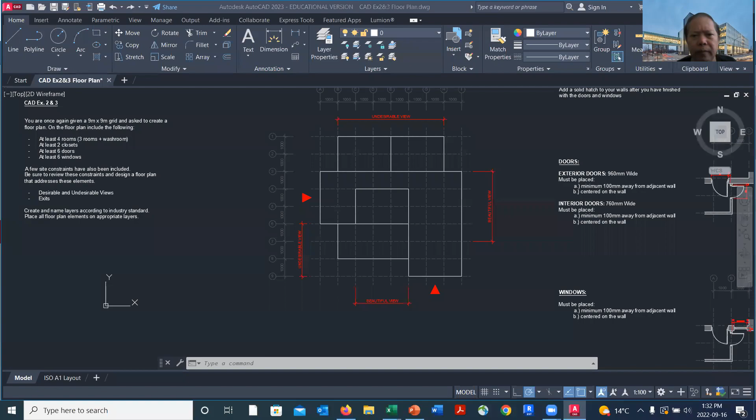So for this one, it looks like I might be needing more space. So I'll just try to use the entire 9 by 9 footprint or space.

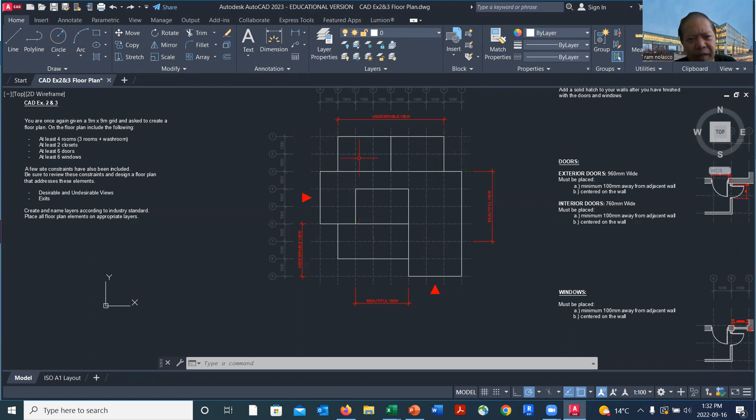So to edit this, I can use the fillet command. F is the shortcut key for fillet, and currently the radius is set to 0. Because there's a radius of 0, if I click on two lines, they will actually connect with each other. So I'll do that again: fillet, select one line, select another line intersecting that line, and it will connect. Let's do that again, fillet, F, select one line and select another.

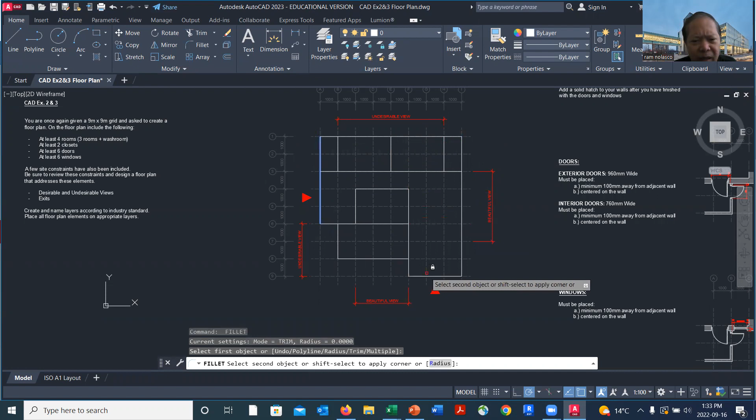Now I have lines that are showing the entire border for the 9 by 9 grid line. Okay, so maybe I'd like to delete this for now. Let's delete those for now.

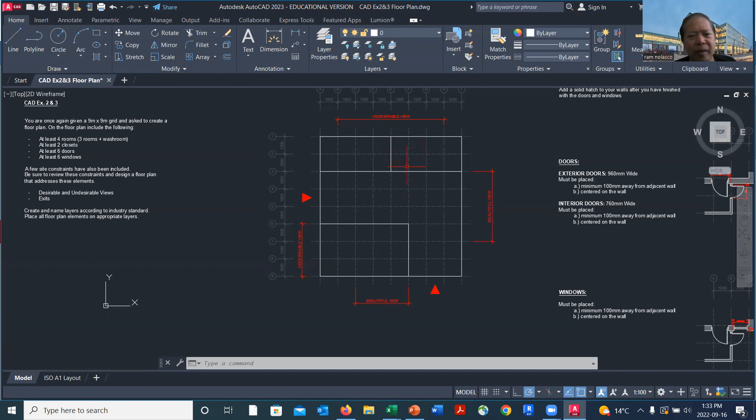And what I want to do is, I'll have my entrance here. Let me delete this. Okay, and I'll try to place my washroom right here at the center where the undesirable view is, right? So it's an undesirable view. That means I can actually place a window there, and that window doesn't have to be open, right? But it can allow light in, so it could be frosted, so I don't have to see anything there.

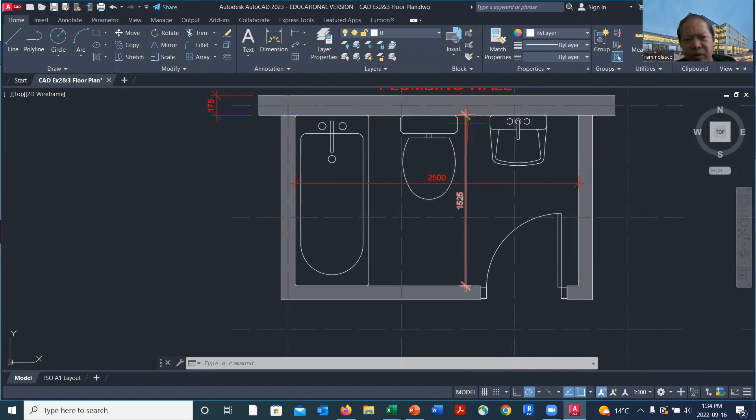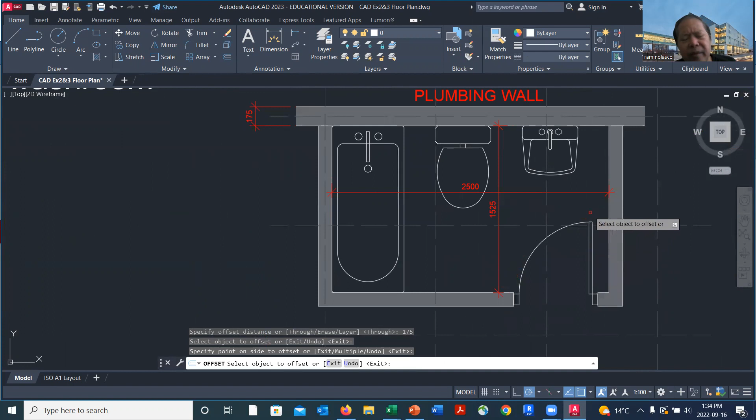So the size of our closet, right, washroom, is about, let's see, 1525. That's 1525 from a plumbing wall. The plumbing wall is 175. So what I need to do is offset this by 175. That will be my plumbing wall. And then place a...

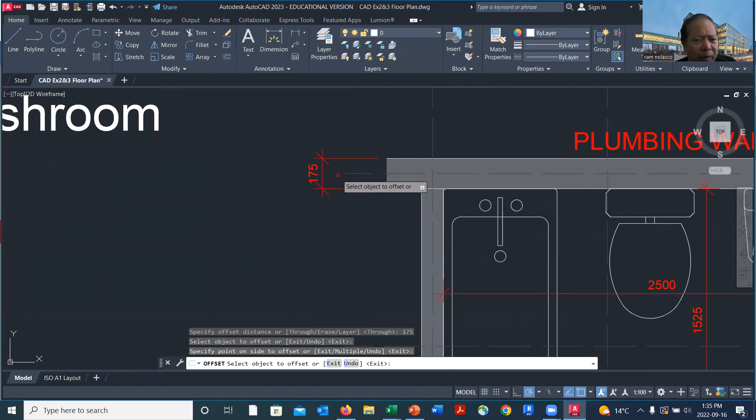2500, so it's going to be going in this direction. So I'm going to rotate this. Maybe I don't even need a plumbing wall right there, maybe it could be a regular exterior wall. Oh, by the way, it's an exterior wall, it should be 175. So that's an error in my case.

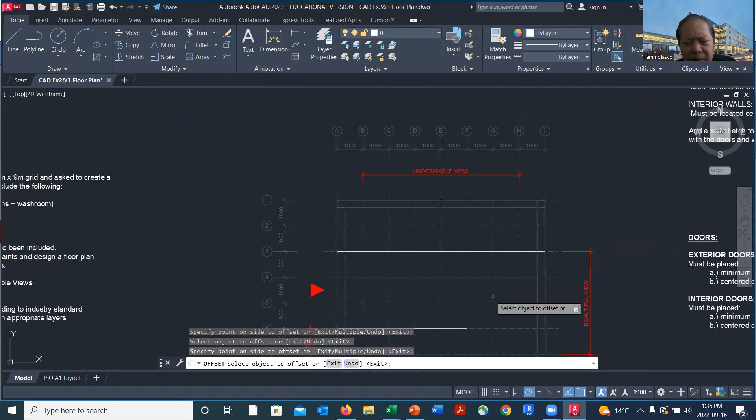But I do need this 2500 distance. So, enter or space bar. I made a mistake there, so I'll just select and delete, offset that by 300. Let me offset this by 300, similar to what we did earlier in the first exercise. Let me offset that by 300.

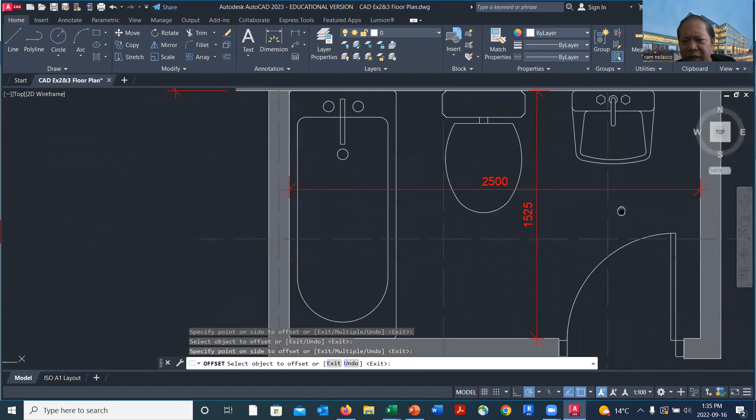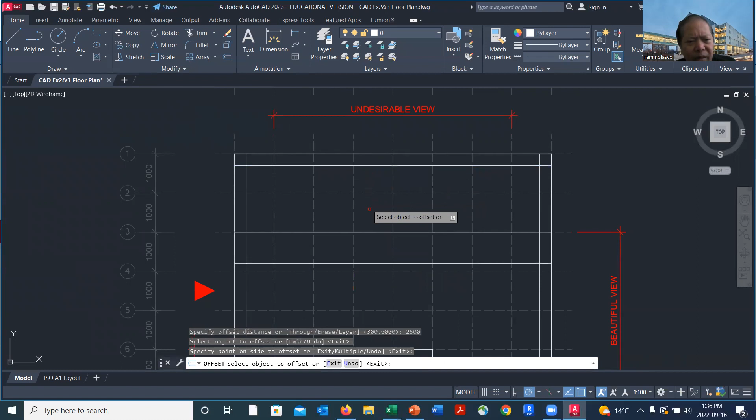Okay, now if I want to place here at the middle a washroom, I need a distance of 2500. That's a clear distance, right, from the interior side of the wall to the interior side of the wall. So 2500, space bar. This is a guide for me because I don't want to be going beyond that. So I'm just going to say offset by 2500. There's 2500, so that's okay, 2500.

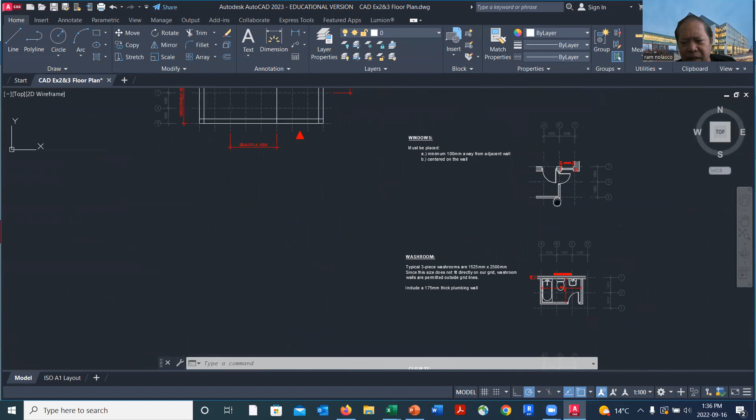So let me delete this first. Okay, delete that, maybe delete this as well. Since we lock the grid, it cannot be deleted. So it will be placed at the center, and this is 1525 in distance. That's the interior distance, 1525.

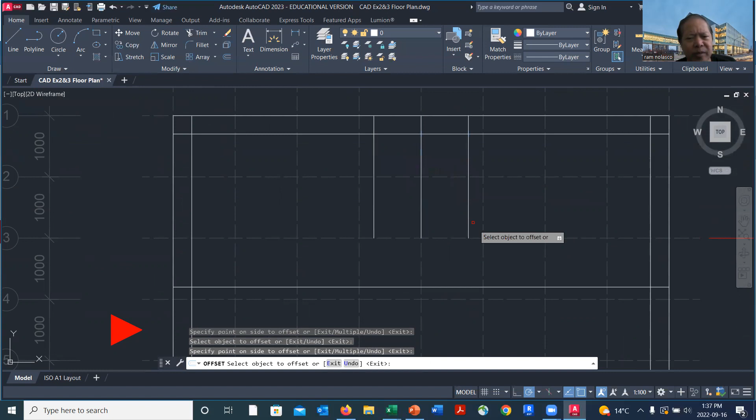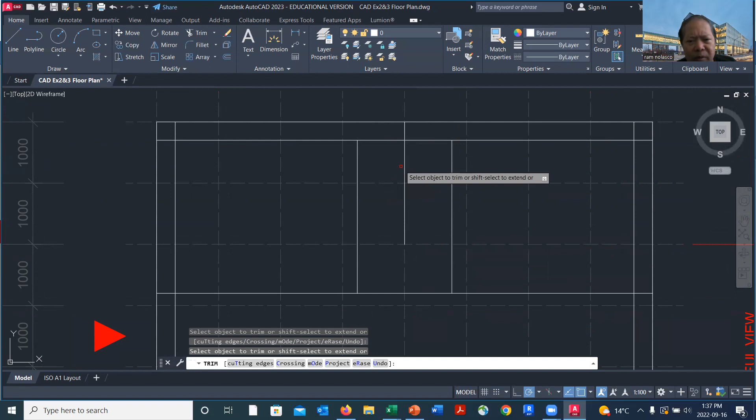So what I'm going to do is, since this is in the center, I'm going to offset that by 1525 divided by 2. Offset this direction, and then offset that in that direction. Space bar to end the offset command, and then I'm just going to trim extend, or TR space bar, hold down the shift key and extend this. Now I can trim that and trim this.

And then I don't need this one here, so I can erase that. And then I can now say I need a plumbing wall here. So plumbing wall is 175, so offset that by 175.

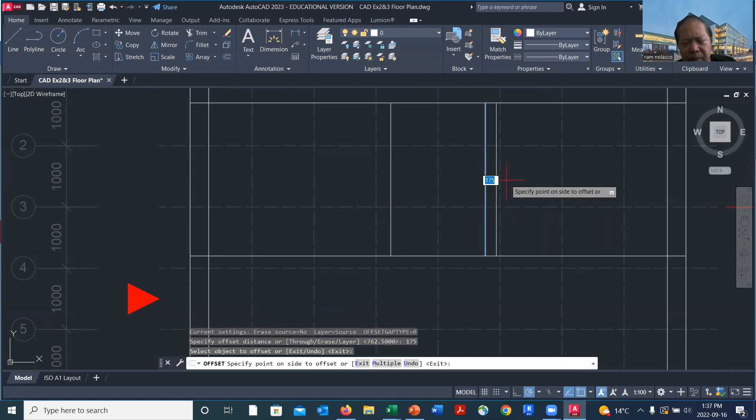Since the entrance is here, maybe I'll place the plumbing here. I'll place the plumbing there so I can have a door right here. That should be fine. Okay, so let's double check.

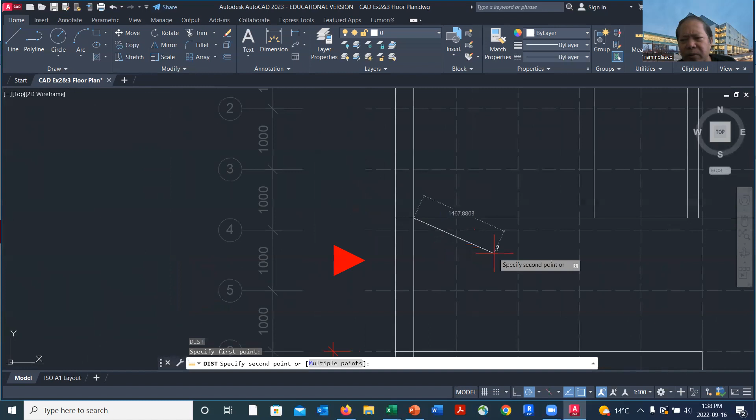Will that work? Do I have 100 here? So DI, that's still 200. So I still am able to create the requirement of a distance of... I don't really need the wall here, right?

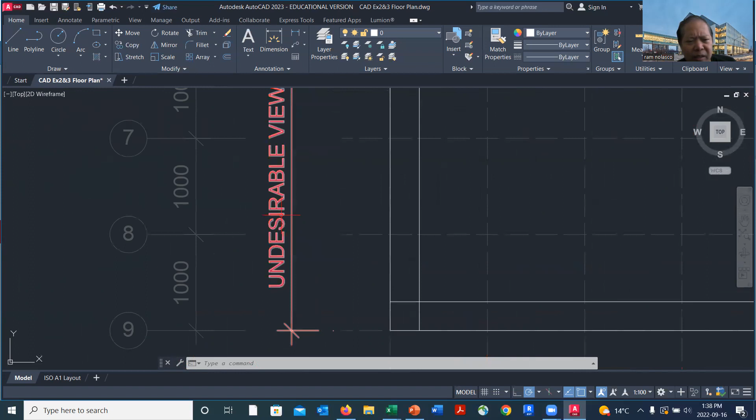If I use this as a living room, but I think I should place the main entrance here. I don't want them to be seeing the undesirable view. So main entrance will be here. That will be the back entrance.

So I might need the room right there. So if this is the main entrance, this could be a room. So I do need 4 rooms. So I can maybe...

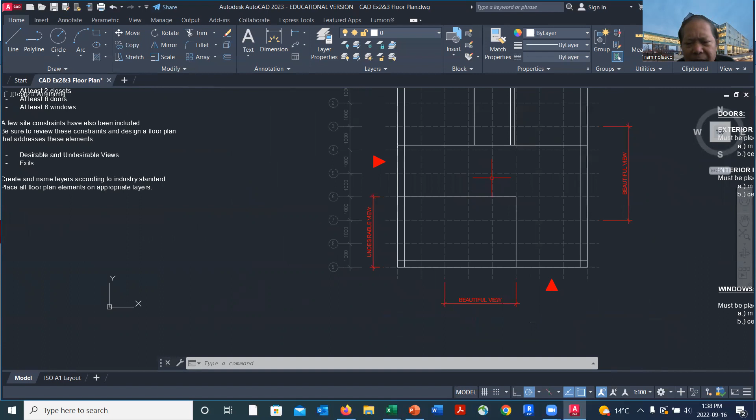Place the closet here, right? If that's a main entrance, I could have a closet here, or maybe a closet right here. I think I'll place a closet right here.

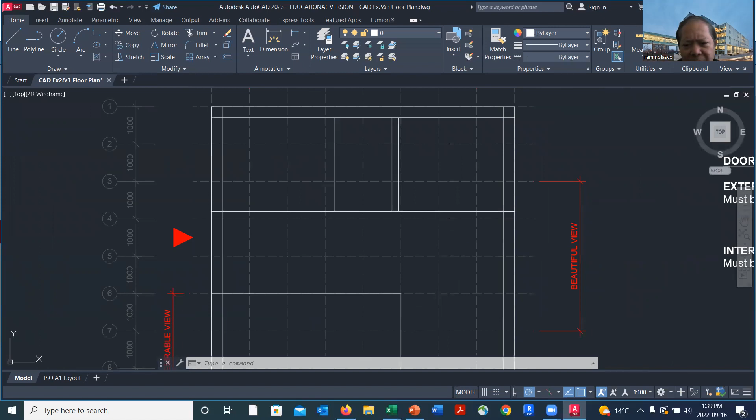And then for this one, I might make this smaller. Let's see, make that smaller. So I could have a nice space right here. This could be the living room,

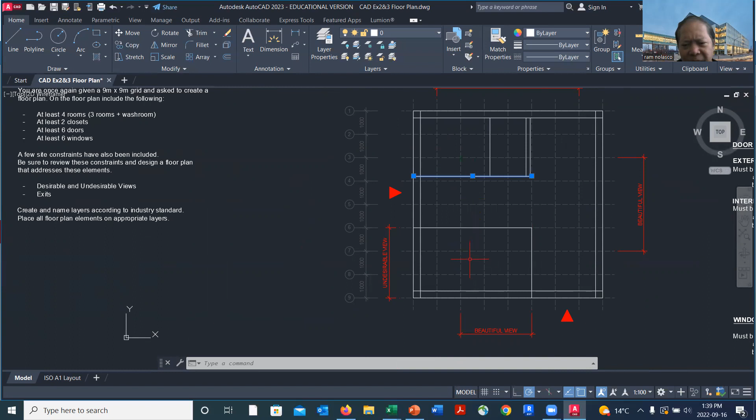kitchen, dining, right? And then I'll have one room here, and then I'll have 2 rooms right here. Okay, so 2 rooms here, but there's that requirement of placing the interior lines at the center of the grid,

I think for this exercise, I'll just place a line right here in the middle. Okay, so it's okay if the interior line is not exactly on the grid line.

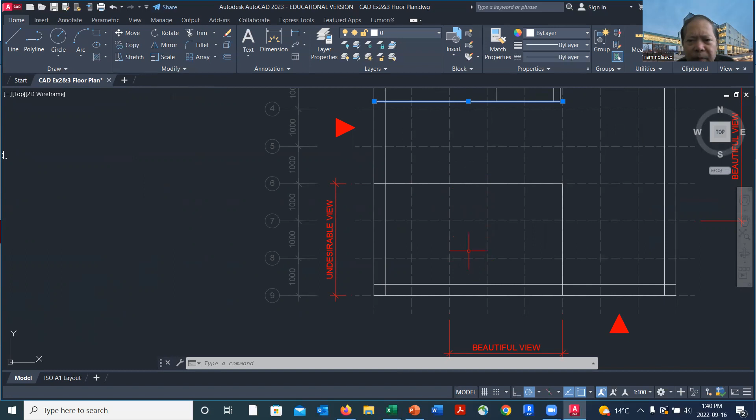Okay, so I have now a space here. So that could be one room, and this could be another room. Oh, anyway, I don't need that room, right? I could have a big room, right?

An entrance, a washroom, and a big room right here, or big room. So I'm not treating this as a hallway. That might work. So I'll just use this as one of the rooms, this as a smaller room, and then I have a bigger room, right?

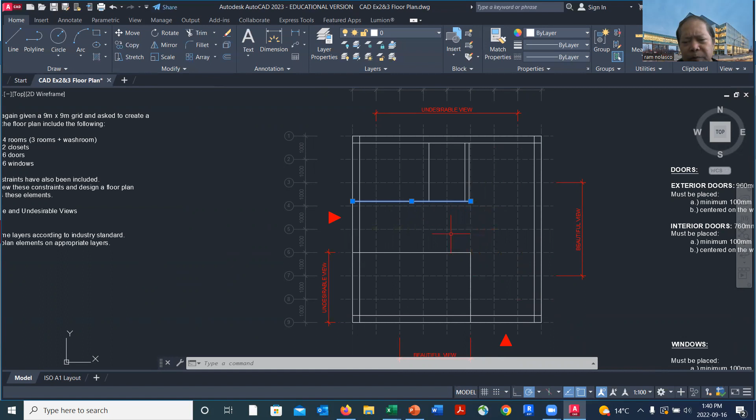And this could be another room actually. So I don't need a wall to divide those. Now for this one, so that's the space that's required, and this is the plumbing wall.

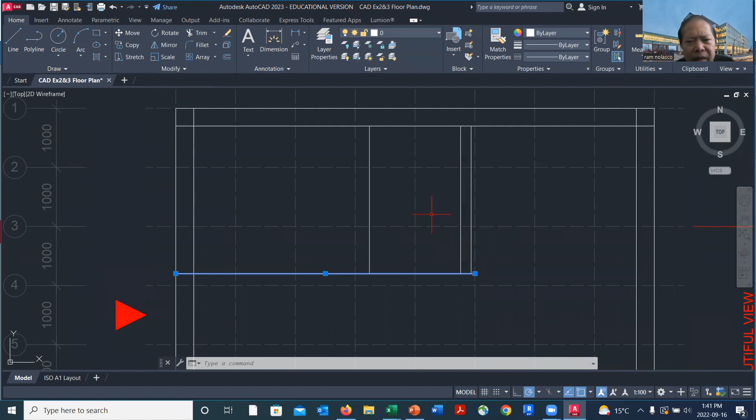So a plumbing wall has to be thicker, so that's 175. Do I need it to be at the center of this grid? Yeah, I can do that if I want to, but I think that's okay. But if I need to, all I need to do is move this by adding a line.

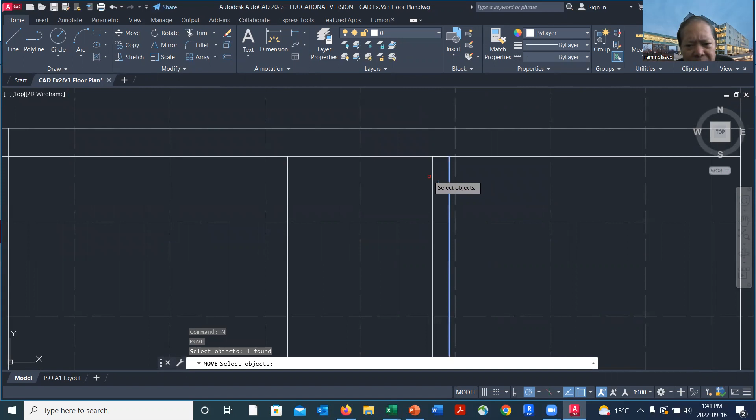Okay, I'll add a line right there so that I have a midpoint. I can click on the midpoint of the line, and then I can move, right? Move this 1, 2, 3. So move that, okay, so that it is aligned to this, or it's at the center, right?

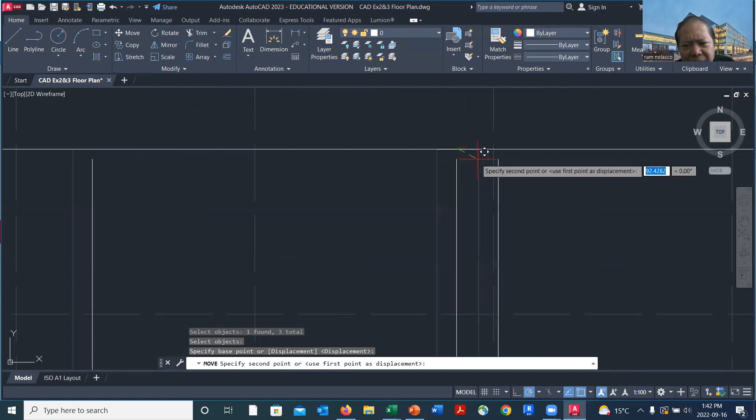So move that from midpoint. Remember, I created a line there. So I can get the midpoint of that small line and then move this at the center. Okay, and then I don't have a need for that. I can delete that.

Interior walls at the center, I'm still compliant. Okay, this one here, I will place an interior wall here at the center. This will be much thicker.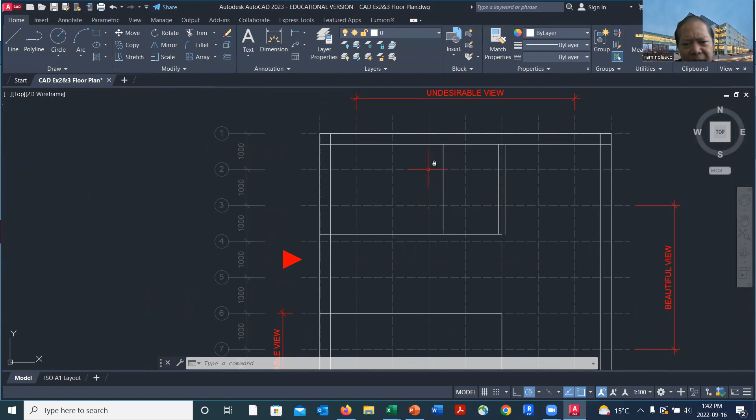And this one, of course, because the wall is only 1525, I think, then it will not be at the center of this room or grid. But then that gives me a bigger room here. Okay, here you go. And then fillet it, right, to close this off. For now, that should be good.

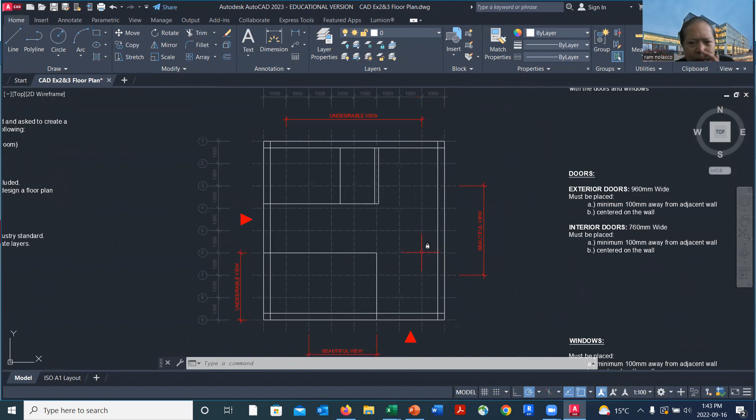And then I can now add doors and windows. I can still adjust that later, but for now, I'm good with this configuration. So 1, 2, and then 3 rooms and a washroom.